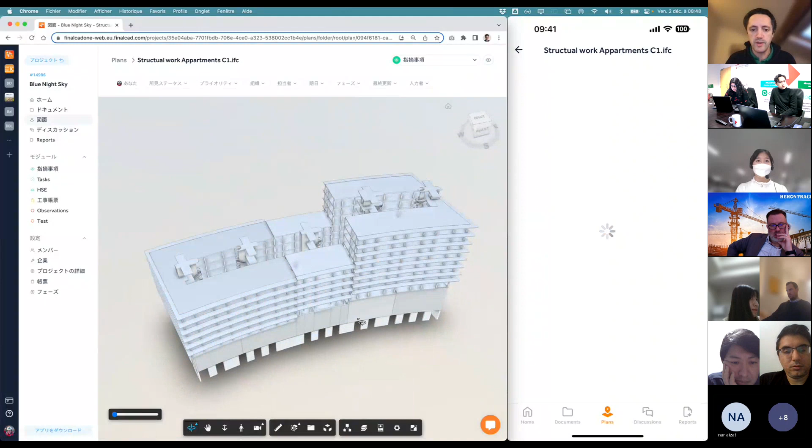I'll go really quick. You have your different modules you can use here on the mobile app. Activity feed to tell you what happened, and you have the same on the mobile side. It's really customizable, and you can embed all your documents, all the documents you want to share, and you have them also on the mobile side. For example, it can be an XLS file, or whatever you want to embed on the mobile side. It's very versatile. All the drawings you want to share, even BIM drawings, are accessible both offline on the web and on mobile.

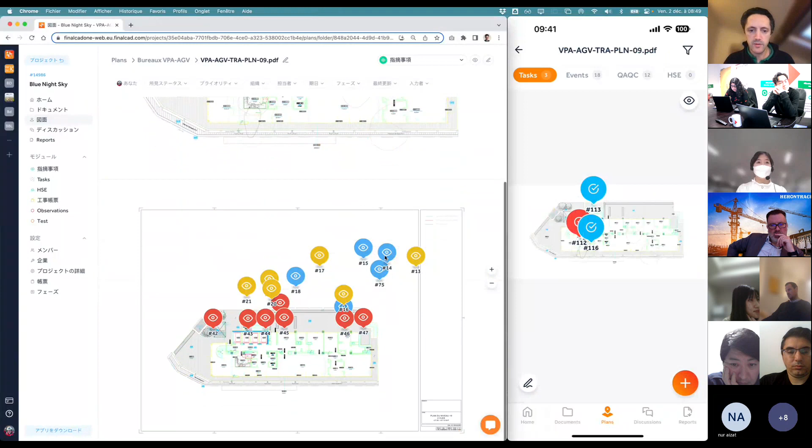So it's really powerful to use on the palm of your hand on site or on the web. If you have some pins on your project, you will see them the same way on mobile or on the web, I can show you that. So you see you can also hide pins, or you can have annotations on the drawings too. Really powerful.

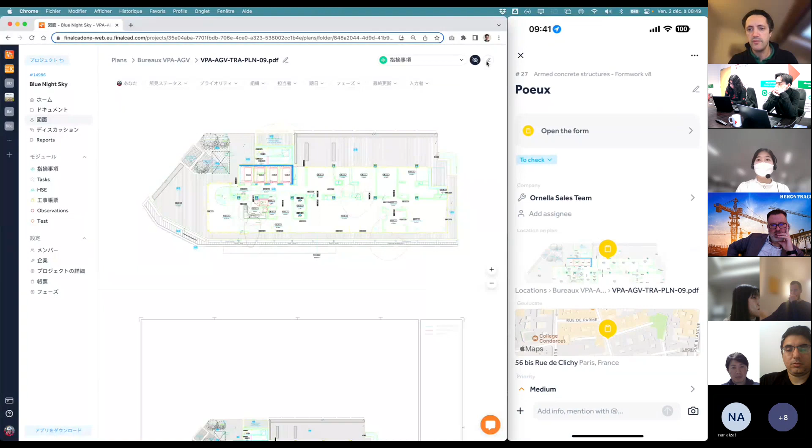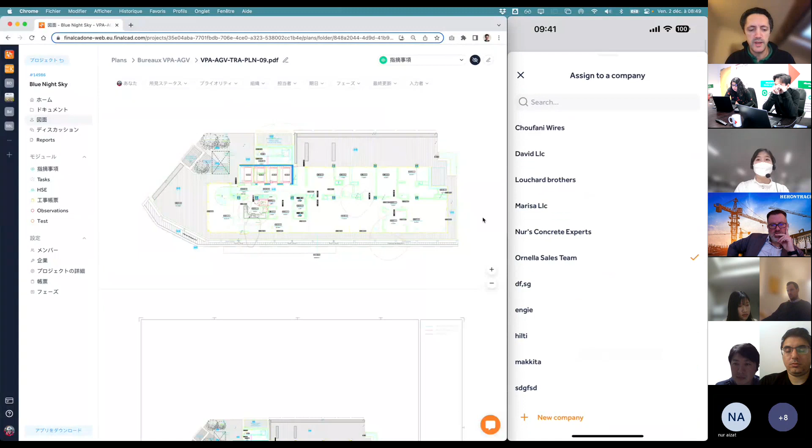You have your different modules, and it's super simple. If you have a quality control to do on a wall, just open the pin. Sorry for the French, you have your dedicated forms that you created with your own language. You have integrated onboarding for users to learn quickly, and it's fully customizable. This is really helpful. You have access to all the information you need on site to collaborate. You can assign to a company, you can assign to someone especially, and you can set a status.

Yeah, so it's very versatile, and everything you see is customizable. You can review everything from the mobile app, say all your tasks. You can review and batch edit them quickly on the web.

Let's say I want to review fixes to make sure they're done. I know that on the 9th floor they're okay, so I can multi-select them and confirm these are all solved, and mass edit everything. It's super flexible and fast when I want to work on all those kinds of items.

I can also chat directly within the software. So if I want, I can have a discussion with site teams - I can say, okay, please update on floor 2. And he can come back to me and discuss with me in real time.

On mobile, it's the same. We can reply live, and it's live between the two platforms, so it's really instant.

Sometimes I need to prepare reports for my customer, for my team on a weekly basis. So I can easily set this up. I can say, okay, I want a PDF by subcontractor, for example.

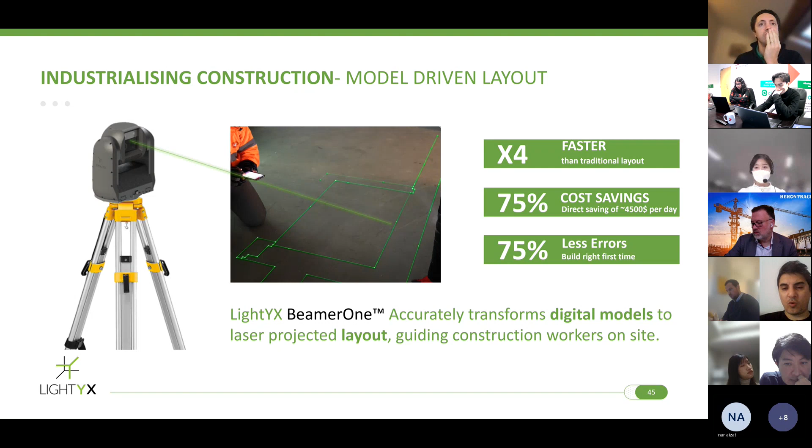So this is what LightYX is doing. Let's understand the flow. First, we upload the digital plan to LightYX Cloud.

When we upload it to the cloud, we download the plan from the cloud to our mobile app that we developed. In this mobile app, we can do two things: first, store the plan with all its layers, and second, use a joystick that controls the robot when we are positioning our device.

After projecting the digital plan onto the field, we can do something else: we can also scan the surface and return this data back to the architect. So we are bridging the gap between the office and the field.

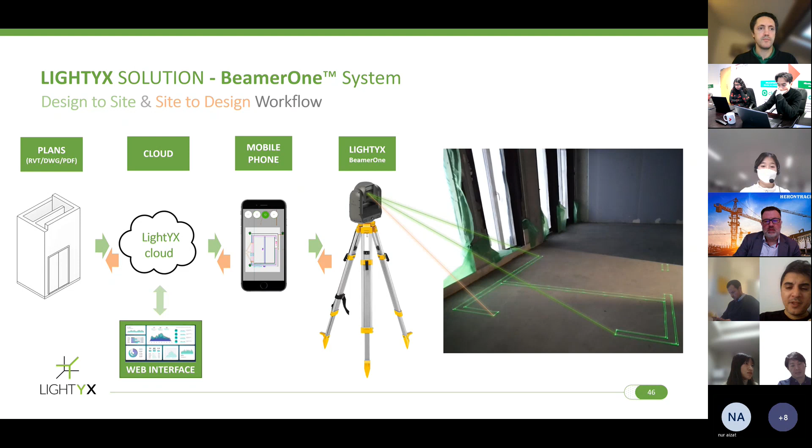Here are some examples taken on site using our laser projector.

Here is how our mobile app looks, a very intuitive mobile app, easy to use. As you can see on the left side, we can choose the element that we want to project. This is how we do it. We project it, we can edit the plan and store it. Sometimes when we make adjustments in the field, or to the plan, we can store it as a new layer of as-built.

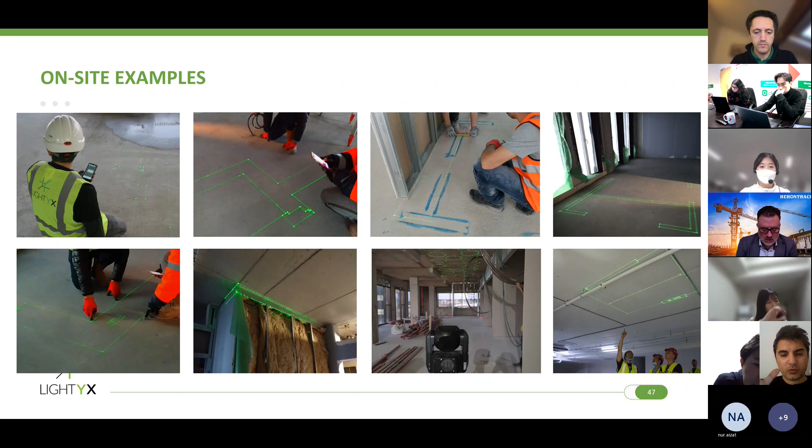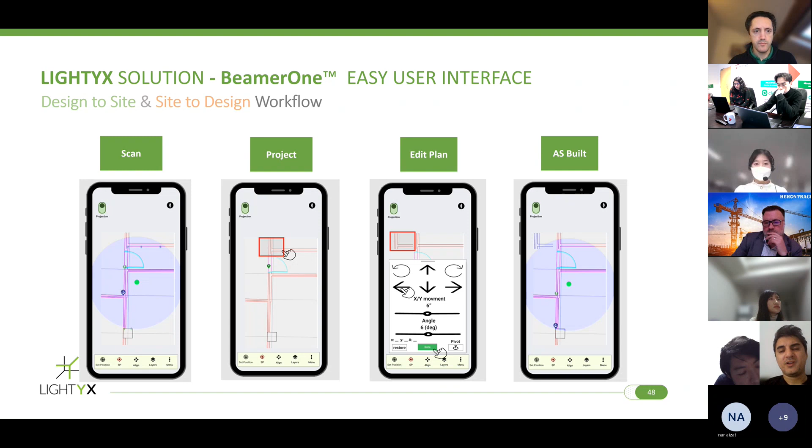It's important to remember a few things about LightYX. First, our accuracy is 2 millimeters. It's very difficult to achieve this accuracy, because the difference between being accurate to 1 centimeter compared to 2 millimeters is huge. So 2 millimeters is very difficult to get, and we are accurate to 2 millimeters up to a range of 10-meter radius.

We can do what normally takes construction companies 5 days in just 1 day, and we save a lot of time doing it.

What is actually the use case for using our technology? We found that those who really need it, those who have the pains, are the MEP contractors—mechanical, electrical, and plumbing—or drywall contractors. They are our perfect customer, and they have all this problem of laying out digital plans.

As I mentioned, we are a minimum 4 times faster. So what it takes traditionally—if you're laying out 120 running meters, with LightYX you can do 500. So we are really quick.

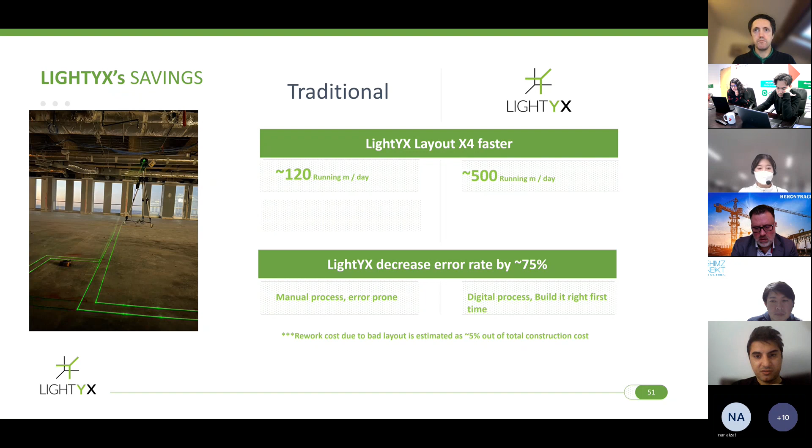At the end of the day, it's about saving time and saving cost. With LightYX technology, you can significantly reduce cost and build it right the first time, without needing rework on top of the layout implementation.

Our short-term business model is leasing our technology. We have 2 programs: a 3-month leasing or a 12-month leasing. If you take the 12-month leasing, you pay every month, but you pay per day.

The cost per day is $625 in the US. When you pay for it, you must use our technology a minimum of 6 days per month. However, you don't need to pay more than 12 days—so if you use our technology for 20 days, you will only pay for 12 days.

So you are paying per day in a 1-year leasing program, and for each group of days you pay monthly.

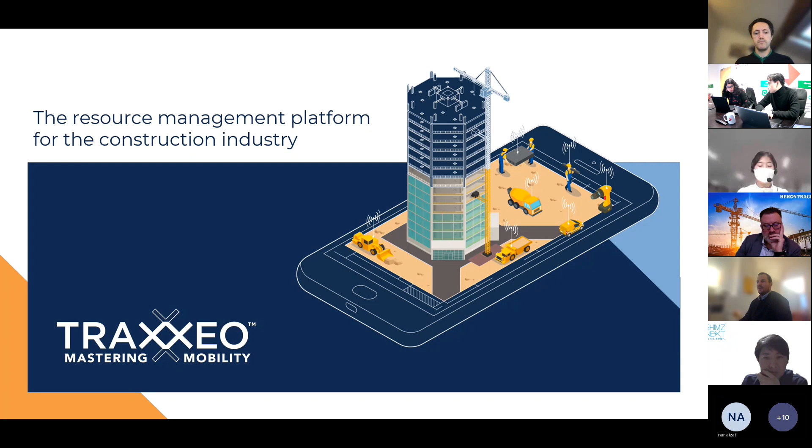SaaS platform, of course, connecting your mobile resources with your company as well as with your partners. A couple of key numbers on Traxxeo: the company was founded in 2008, we have 200 plus key clients, more than 10,000 tracked assets, more than 100,000 workers, and 17,000 companies managed in the company, with about 40% yearly growth these days.

We are a team of 35 people, mainly based in Europe - Belgium, France, and Luxembourg - focusing on the impact of Traxxeo on our clients. The three key missions we have are to connect work sites and workers by simplifying complex and administratively heavy business processes in order to accelerate reactivity and ensure safety, empower workers in their daily jobs, and increase productivity in office and at the job sites.

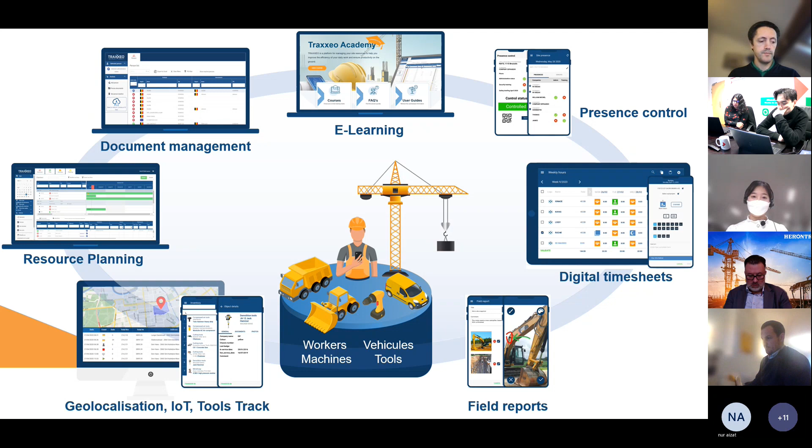And today I wanted to focus on one use case that we have, which is the personnel registry tool and document management platform that we have.

What are the origins of that? In Europe, we saw at our clients key needs around managing the legislation and worker safety on site.

The key points were that our clients wanted to collect mandatory documents of the workers from subcontractors, share mandatory documents of the workers with clients on time, ensure the availability of all the right documents, avoid fines if they had controls on site, ensure legal order of the work sites and the workers, and also ensure the daily declarations and control to ensure a dynamic management of the resources on the work sites.

And so, in the past years, we've been developing a platform called MyLegalDocs. The objective of that platform is to connect and certify construction workers. We've built that platform with a couple of key partners, I would say technological and legal partners, industrial partners, and also with financial support.

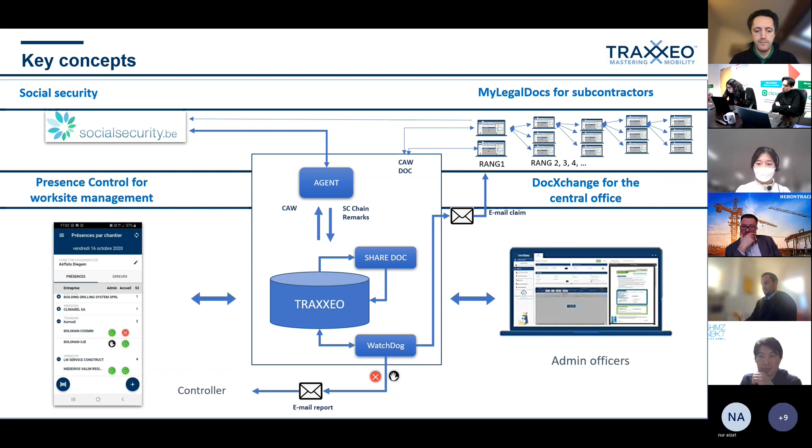In that platform, we have modeled a number of things. We have defined, and it's possible to define, a lot of different administrative profiles. If you take the example of Belgium, we have more than 23 profiles of workers. The key concepts that need to be managed are the nationality of the employer, the nationality of the worker, and the type of contract. Based on that, we can define the profile.

We have included the legislation in the platform, where basically we say to every subcontractor: if your worker is from Europe, from Belgium, if your employer is from Europe, the worker is from Belgium, and the contract type is an employee, then it's admin profile 15 on the top right. You need a proof of identity, and these are the documents that are valid for that. You also need proof of work, and again, these are the valid documents.

Then, in order to optimize the management of these documents and go from document management to data management, we worked on making that transition from document to data as easy as possible. We work with artificial intelligence to help the platform recognize all the right data points needed for managing the worker. We train the platform to recognize more and more documents, and we have very good recognition rates. The more documents you have, the better the recognition is.

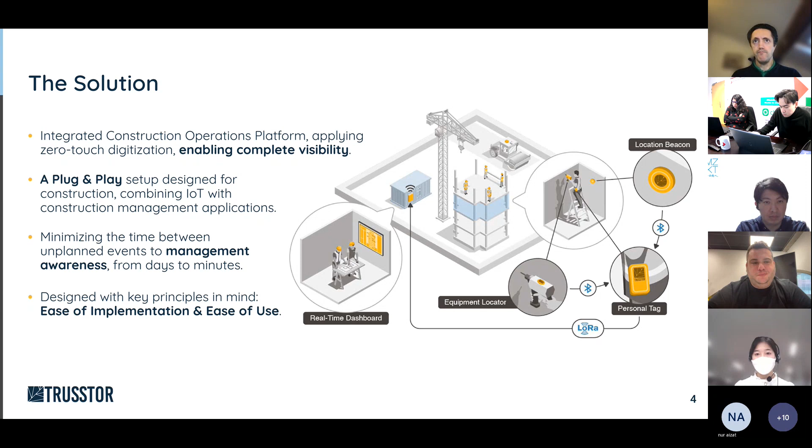So the product divides into two. The C squares, we call it, the command and control - basically the dashboard that site management looks at when they want to get information from the site itself. This brings them 4 core capabilities: oversee, know at every given point of time where is everyone, what tools and equipment are they using, and what materials, their locations and allocations; analyzing the information collected from the working environment, understanding the situation and status of the site itself; measuring work sequences and comparing actual versus planned using our last planners; and finally reacting immediately to site status, shortening the time frame between any event happening and site management's ability to react.

The second part of the product was actually a byproduct we understood when we started the company. We wanted to get the numbers behind whatever is going on in the working environment, and very quickly we understood that no one has that information. Once we tapped into our data sources and started to analyze the working environment, we began providing our clients with periodical analytics - basically a McKinsey or BCG type report that sets benchmarks for changes and improvements, cross-site and industry standard comparisons, and gives a short, concise overview of what happened in the working environment over the last 3 months: bottlenecks and issues that need attention, but also positive things.

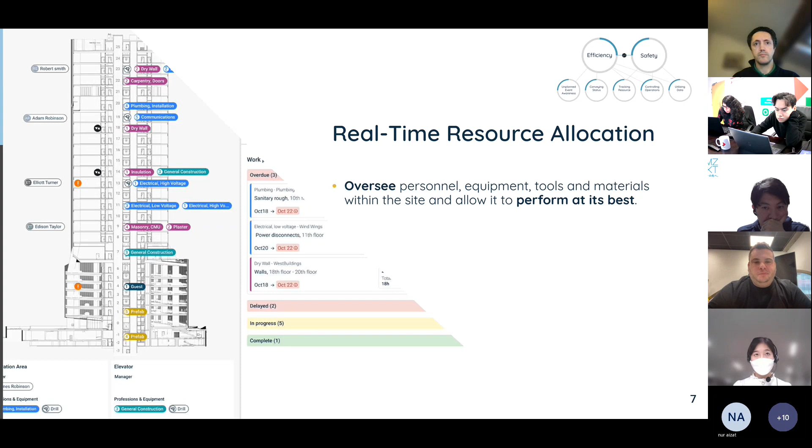So as you can see, the dashboard itself divides into 4 sections very clearly and easily. On the left, you can see an overview of the site itself - how many people are present from each trade group, and the equipment being used. The middle section is the side view of the building - of course this accommodates any type of project, whether commercial, office, residential, infrastructure, or multifamily, it doesn't matter, we know how to adapt it. It shows the location and allocation of resources, as well as every dynamic working area, i.e. scaffolding, elevators, and any type of area you'd like. On the right, you can see a safety log portraying both live and resolved events. The last section refers to the work plan widget, which we'll touch on in a minute.

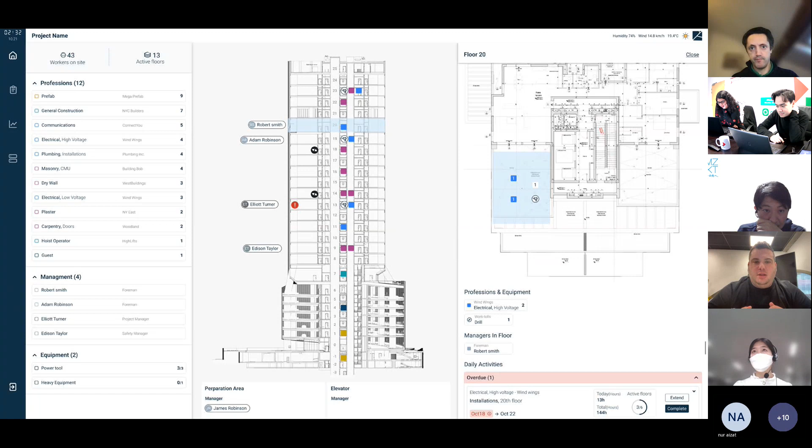When clicking a specific floor, a floor plan opens up and shows you the micromanagement of the area itself, so you can make a better decision based on the most precise information.

The next core capability is the work plan generator. Basically, based on the last planner concept, we created a scheduling ability that allows everyone to communicate in the same language. They know exactly who needs to do what, where - and this also provides a second layer of information, comparing actual versus planned.

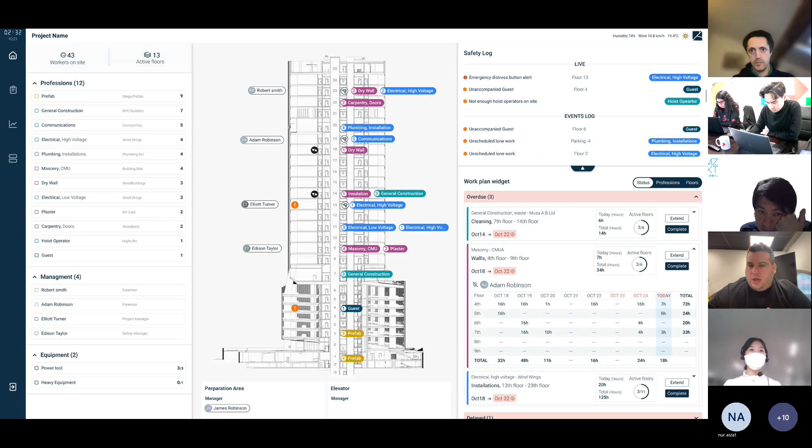As you can see on the right side, you have the ability in the work plan widget to control the daily operations happening on site, understanding what's overdue, delayed, or completed, and force complete certain activities or extend their duration to keep them on your timeframe. We believe in three time dimensions: the master plan or project Gantt portraying the entire project's scheduling, the milestones and work plan derived from that, and finally the actual. This enables us to compare the work plan and the actual.

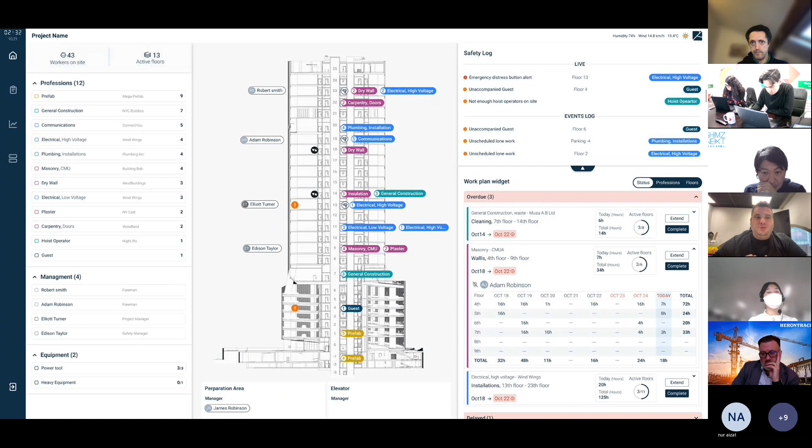The site safety system has 120 different conditions that it constantly checks - if someone walks into an unauthorized area, uses an unauthorized tool, both behavioral and environmental. If someone is working on scaffolding on a high floor and there are strong winds, the system will inform the safety manager that he needs to move everyone inside, making the working environment safer. We can connect any sensor in the working environment, including humidity, noise, pollution, etc.

The last core capability is the smart summaries. We wanted to take all the information from the working environment, analyze it, and provide a concise, easy situation that you can look at and just understand.

As you can see here, the executive summary portrays work resource analysis, activities analysis, and safety management abilities. At every given point, the system updates in real time so you'll know exactly how many people are from each trade, how long they spent on site, their resource allocation and location, where they were during the day, the progression of different activities and who's responsible, but also in terms of safety - who, where, when, and why each safety issue happened. We can also go forward with subcontractor analysis, analyzing each subcontractor.

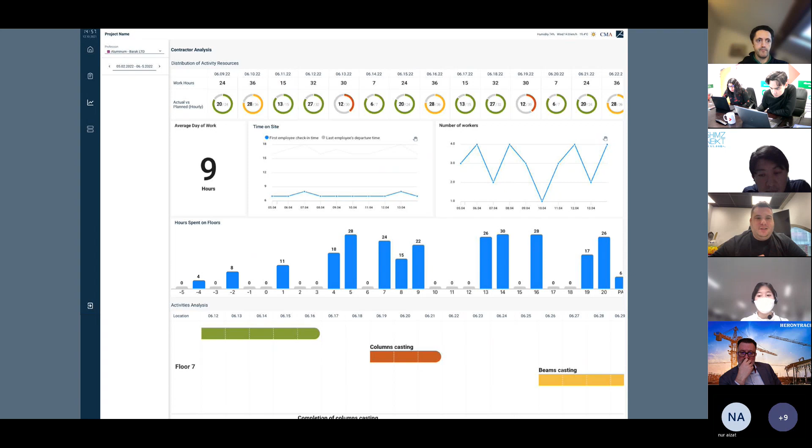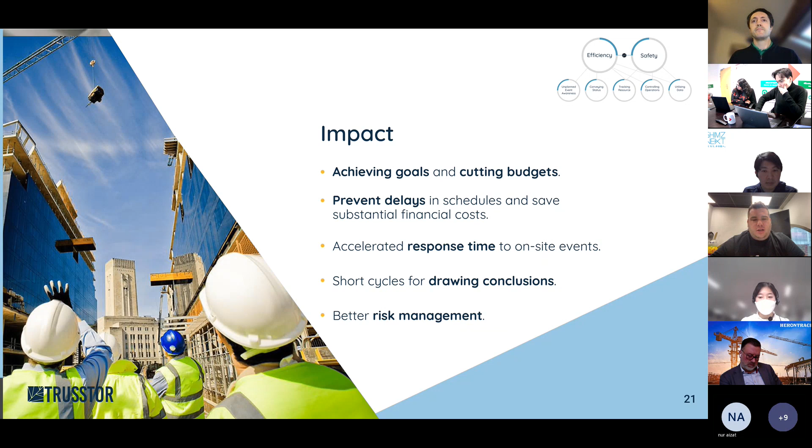Also the work plan analysis - you can jump all the way to the impact. The main impact we want to create is achieving goals and cutting budgets, preventing delays in schedules and saving substantial financial cost, accelerating response time to on-site events, shorter cycles for drawing conclusions, and better risk management. Thank you.